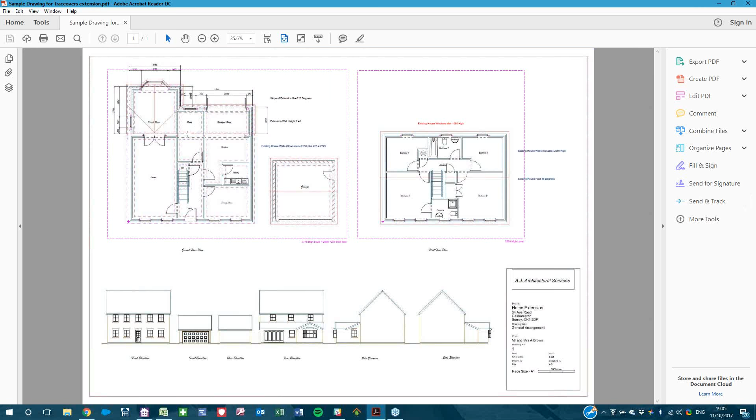Now on the PDF, that's it - let's grab the PDF and move it around. There we go, it's going to zoom in to this extension here. This is the extension we're actually building off the back of this property. Off the back of the extension, we've got a nice little L shape. We've got a lean-to roof, a couple of windows, a bifold door running off the back, and a bay window at the front, as well as the lean-to roof. We're also going to knock through or form some openings into this back wall that are then going to extend onto the back of that build.

Now, if I just zoom down a bit and then zoom in on the PDF, we can all see on the elevation side what the extension is going to look like off the back of the plan. So how do we get the PDF into PlansXpress?

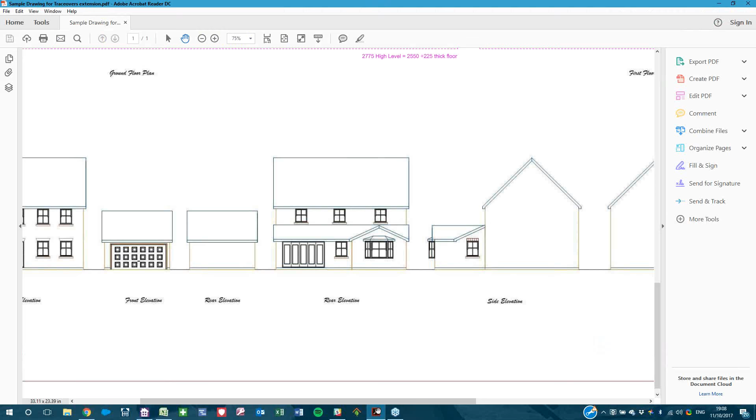So in order for me to get the PDF in here, I'm just going to go back to the PDF. I know it's an A1 1:50 drawing. We've got the drawing size, the page size, and the scale on there at 1:50.

Now, I've already got an A1 1:50 open anyway, but to demonstrate how you would open up a new drawing, you go to File, then New, and you'll see New from Template. When I open that, a dialog box pops up showing A1 1:50 for me to pick, so I'll just select that one.

And now we've got a second drawing on the page, which is A1 1:50. That's how easy it is to open up a new drawing. As I said, I've already got an A1 1:50 open.

Before I bring the drawing in, I just want to make sure my pen is right, because it's a drawing system with pens in different colors. You can set different colors, but we're actually going to be changing it to scan mode anyway.

What scan mode does is put a nice thick red line around the drawing you're tracing over, so you can see what you've copied or drawn out from the original plan. So I'm going to switch that on to scan mode.

Now to get the PDF in there, the PDF itself is called Sample Drawing for Traceovers. So what I'm going to do is go to my Drawing and Annotation tab, with all these little tabs running across the top, and click on the image file button to locate my image file.

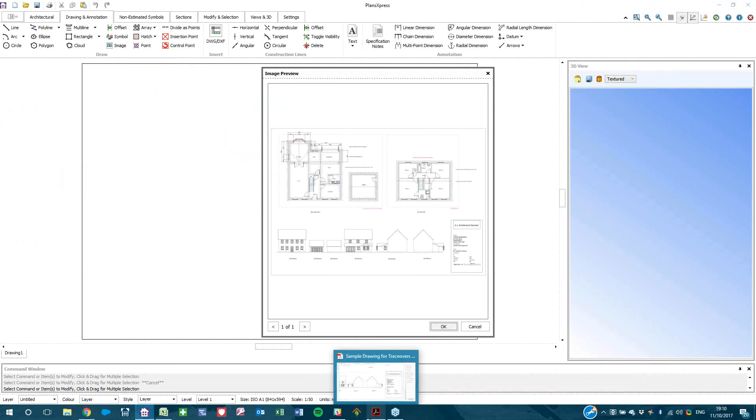I've got a folder called My Drawings, and my sample drawing for Traceover extension is located there. I'll click open, and we get a little image preview. Yeah, that's the right drawing, it looks like the PDF we had open, and then we click OK.

Now using the mouse, I'm just going to locate down to this bottom left hand corner. You'll see a little dialogue popping up saying Origin - that's the corner where I'm placing the PDF. With a left mouse click, stretching the mouse up to the top right hand side, that's our PDF in there.

So that PDF that existed as a PDF is now in my PlansXpress software. There's a couple of things I'm doing there - for those using Windows with a standard mouse, you've got a little scroll wheel. I'm rolling the scroll wheel so you can see me zooming in and out, and if I push it down, I get this little grab function.

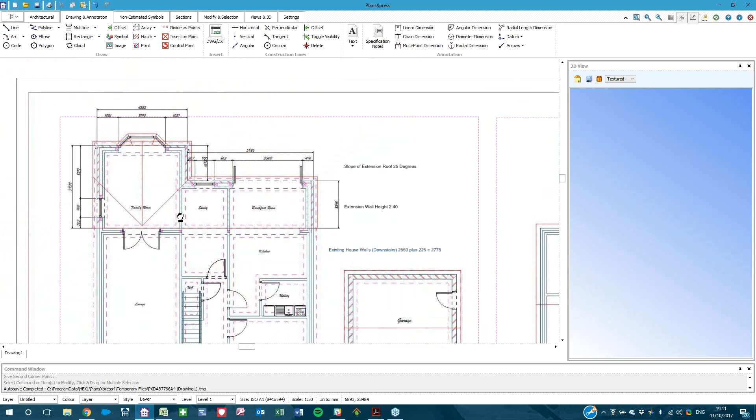It's quite similar to the grab function in a PDF, and I can move the drawing around wherever I want, so I can really stretch it out and get into the corners of the drawing that I want. Now Adrian Wild, the architect of the software, has always told me the best thing to do before drawing over anything is put down some construction lines.

Construction lines, imagine this in the real world, it's obviously a bit of string or rope that you're laying down, and it's kind of laying out the overall plan of the build. And it's the same in the software.

We've got these construction lines up here, horizontal ones and vertical ones. So I'm going to place a horizontal construction line. I'm going to line it up with this back wall where we're actually going to start the walls of the extension, and I'm also going to place one on top of that wall where the wall's running across the top. So what I'm doing is lining out where all the walls are - a wall there, a wall there, a wall line there, and a wall line there. Now I'm going to change it to a vertical construction line.

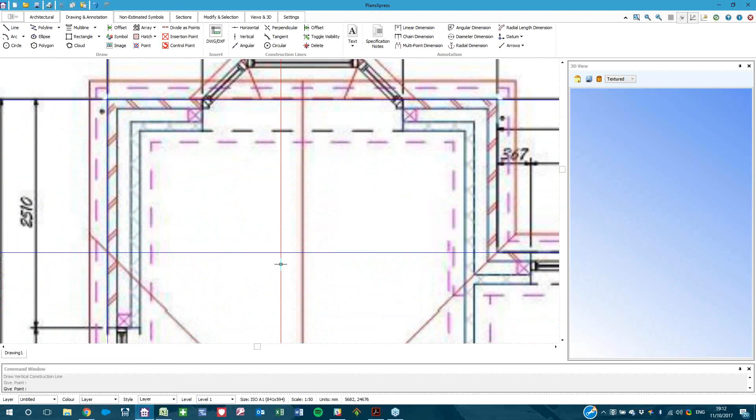I'm going to highlight the outside wall there, and I'm also going to highlight the outside wall line there. That will become obvious in just a second when we start tracing over these external walls, because the construction lines are going to act as a guide for me to trace around, so everything's going in a straight line.

So this wall is actually made up of a brick and block cavity wall. We know the wall height is 2.4 meters high, and we also know when we place the extension, the roof is a 25-degree pitch.

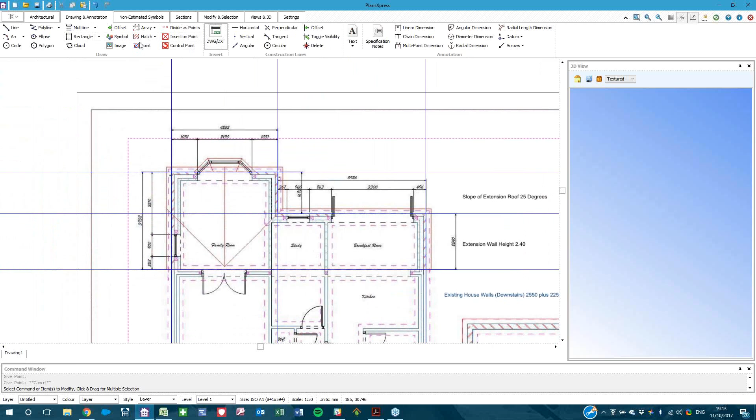So I'm going to pick the walls first. Now the walls can be found on the architectural toolbar at the top - I was in the drawing and annotation toolbar, the one to the left is the architectural toolbar. This will contain all the elements that you can use to actually build in PlansXpress.

Now I'm going to be drawing the external walls. If I drop that down, you can see I've got a few options here. I can pick a brick and block cavity wall, an external block cavity wall if we're doing a render finish rather than brick, or a stone cavity wall. We've also got some other walls like ICF walls and SIP walls if you're using that particular building method. If you happen to do some cladding, you can apply cladding to the walls you're building.

If you need to convert any of the internal leaves to a timber frame panel, you can do that as well. Or if you're doing garages and just using solid leaf brick walls or solid double leaf brick walls, you can choose those too. But I'm just interested in doing a brick and block cavity wall.

Now, as I said, the wall height is 2.4 meters. You'll see here I've got two options around 2.4 - I've got a multi-story wall or a single story wall. If I pick the multi-story wall, what that would do in the dialog box is give the height of the wall an additional

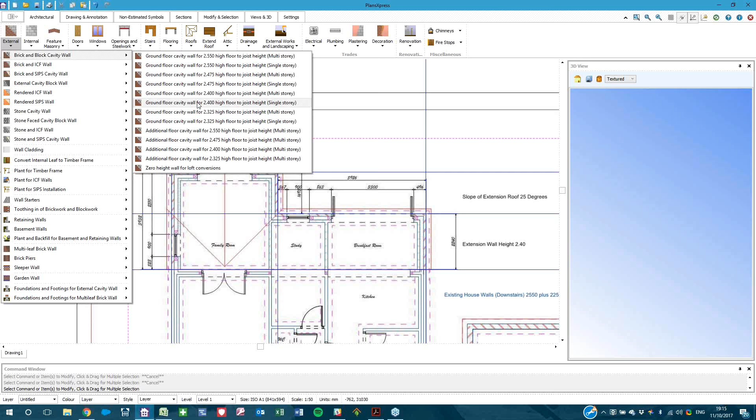225 mil for the additional floor that's going to sit on top of the bottom floor, giving me my floor space on top. But if I actually pick the brick and block cavity wall just on a single story, 2.4, then all it does is give me 2.4, because it doesn't assume we're doing any other floors on top of this one.

Now you'll notice this dialog box does open - these dialog boxes are exactly the same ones you'll find in EstimatorXpress. So if I was estimating without PlansXpress, this is how we would actually estimate in EstimatorXpress. So what we're effectively doing is estimating the plan, and when it gets fed into EstimatorXpress it just reads all the dimension sizes and estimates based on what you've told it. You'll see here it's the overall wall dimensions, we've got 2.4 for the height.

We can also switch on these two little buttons and they give you a bit of help. So if I switch on my tech tip, if I'm in that section asking me for the height, you'll see a little description in the top right hand corner of what it's asking for - it's asking for the height of the wall, the overall external brickwork measurement, measured from above the DPC there.

For simplicity, differences between the height of the inner block work leaf and the outer brick leaf are actually ignored, so there's a little guide there to tell you what it's actually doing. Same if I go into this, you've already got an external leaf thickness in there, so it's making some assumptions about the makeup of this wall.

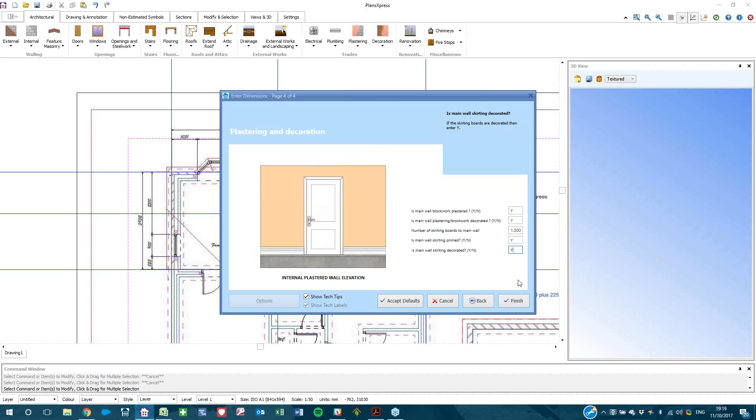We've got a yes in there. Are you going to be putting a skirting board in? Yes, we are - we're going to put a skirting board around the internal leaf of the walls. Are you also going to prime and decorate the skirting boards as well? Yes, we are.

So when we press finish, what I'm now going to do is actually place that wall in that corner. Now you can see you've got a little bit of dialogue - hopefully you can all see it, it's quite small. It says the intersection - that's basically the intersection of the construction lines that I laid down, which help as a guide.

So if I left mouse click on there, you can see that little red line - that's the wall I'm about to place. And I also just need to flip the walls to the left-hand side. That little arrow is telling me that's pointing to the outer leaf.

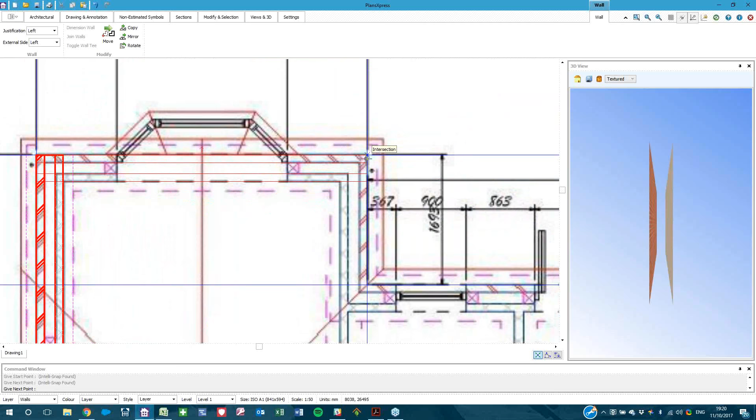Now if I go up to that construction line, it's actually finding the intersection. I'm clicking on there. You'll also see on the right-hand side where the 3D is, you can actually see this getting built up in a 3D environment, so you can see our bricks and the shape of the extension already kicking off.

What I'm also going to be doing is placing a wall from that corner to that corner, because when we're building off the property, we're obviously going to be building off an existing wall that's already standing. Now, obviously, you don't want to be estimating that wall because it's already there. So what we can do, we've got a little feature built into the software.

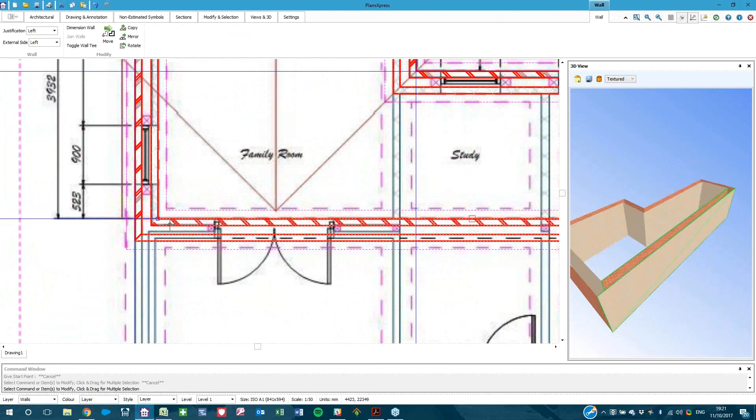If I select that wall, you'll see it selected - on the 3D it gets a green line, so that tells me it's actually selected. And you can see there it changes, not shape, but certainly a different kind of view. It's all a bit broken. So that means you've actually selected that wall.

Now what I can do, the middle scroll wheel button has an extra function. If I press it down, it gives me these other options. Now what I can do is actually set that item as non-estimated. It's asking me again to double check, are you sure you want to do that? Yes, I do. So that wall now isn't going to be estimated when we put it into EstimatorXpress, because as I said, it already exists.

But what it's going to be used for is when we actually form the opening there, and also there - you'll probably be putting a door on this bit to get into the extension. So we're actually going to be using that wall to form these areas, but we're not going to estimate it.

The next thing I'm going to be doing is placing a slab into that space there. You see here at the moment there's not a slab in there. So I can go to the flooring section. We've got some different options to choose from - suspended floors, cassettes, slabs, raft and toe, beam and block if you're doing a beam and block floor. We've also got some tiling and commercial carpeting, and just standard screeding as well.

So what I'm going to be doing is placing a slab. I'm going to pick the slab, pick the extension slab, and then it gives me an option - is it reinforced, is it unreinforced? I'm going to pick the reinforced slab.

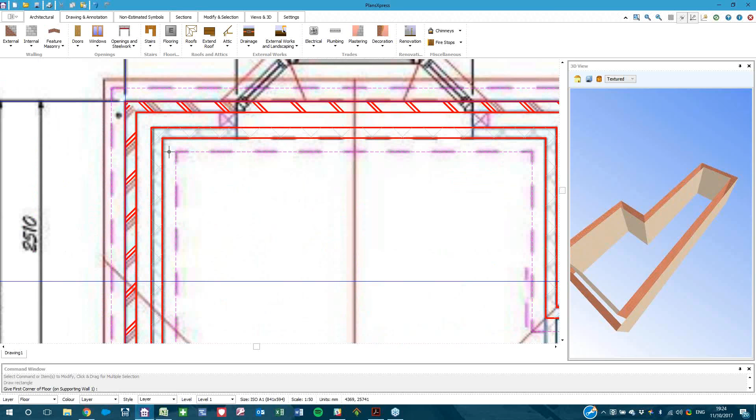So to place a slab, I'm going to go to that corner, click to that corner, and then pull the slab down to that corner. I'm not going to put any perimeter insulation, but I can do - I would just go around the corners and put the perimeter insulation. That's only half a slab though. If I want to place the rest of it, if I right click, it remembers my last command.

So there's little shortcuts we've actually built into the software. I'll accept defaults there. I'm going to put the other slab from there to there, and then go up to that corner to meet the other slab. And then you can see there, we've now got the slab into the extension as well, giving me that area of slab on the extension.

So what I'm going to do now, I'm actually going to put in some internal block walls. We've got two block walls here. Using the internal block walls, I could put some internal cavity block walls if I wanted to, but I am just going to do the standard block walls. But you do have options in here for stud walls, metal stud partitions, and also options of SIPs and ICF and stuff as well.

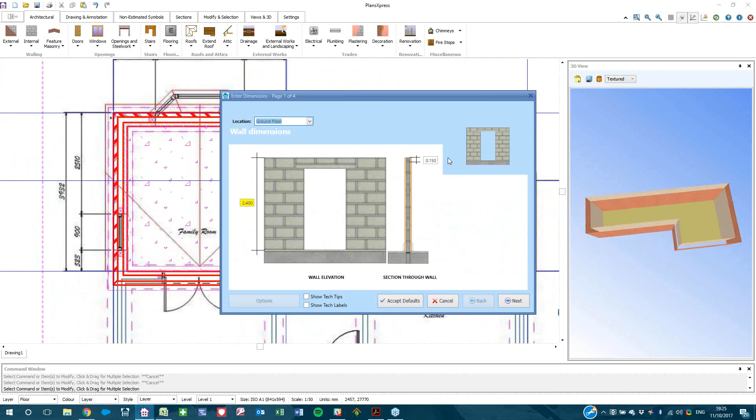Again, 2.4, so the same as we pretty much did with the external walls. I'm going to pick 2.4. Very, very similar. Obviously we've got, you might have a door in there, but we are actually going to do foundations and footings on that as well, and then press finish.

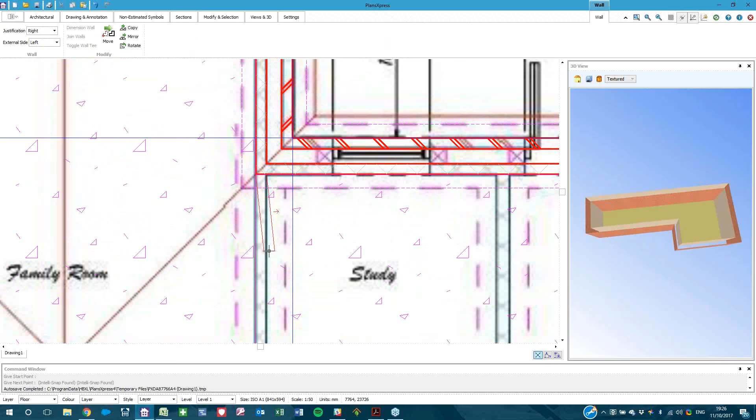And then what I'm going to do, that's going to be my first wall. Now you'll see there it's just hanging over the edge, because if I was doing the wall that way it would be flush to the edge. Now there's a real nifty way to change that. You'll see these little options here, top left-hand side. If I just change the justification to the right-hand side, you'll see now it's actually flush. And once we get down to that point, it will then drop, I'm just going to zoom in, you can then see that block wall on the 3D.

If I right click again, it will remember my last command. This time I'm actually just going to do a wall freehand, and then we can just drag it down, find the perpendicular point to the other wall, and again you can see on there we've now got our two block walls.

So what I'm now going to do is show you guys just how we form an opening. Now the best way to do this is using your construction lines, because what I'm going to do is drop a vertical construction line just on the edge of where that opening's being formed. Then I'm going to use the linear dimension tool. So what I want to do is measure from that construction line to that wall, and that's giving me a gap there of 3.3 meters.

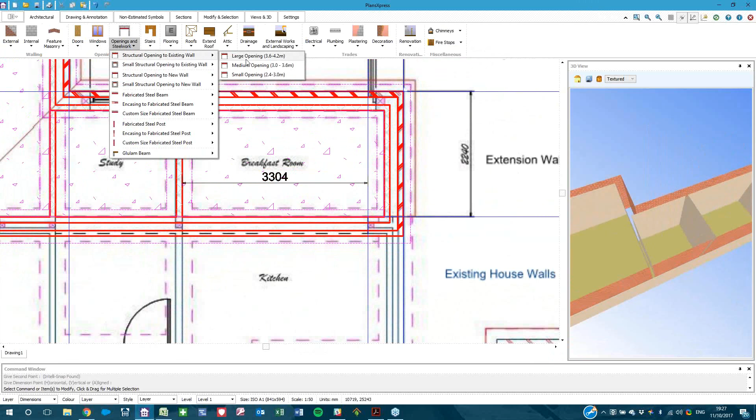So what I'm now going to do is go to my openings and steelwork. This is where your structural openings are found. We've got a structural opening to an existing wall, structural opening to a new wall. So I'm going to do it to the existing wall. I'm going to pick the medium opening, but I'm actually going to make that adjustment 3304... I can put the 04 in there if I want, or just use 3.3 meters. This will also give me an estimate once it goes into EstimatorXpress.

You can see there we've got our steel going across there. We've got the height of the opening. We've got our pad stones. We've got a number of bricks at each end. And we've also got a number of slates required for packing. And then we've also got our plastering around the opening as well. And then all we do, that's the opening there, all we do is then line it up, and then just left mouse click, and you can see on there we've now formed an opening on our 3D.

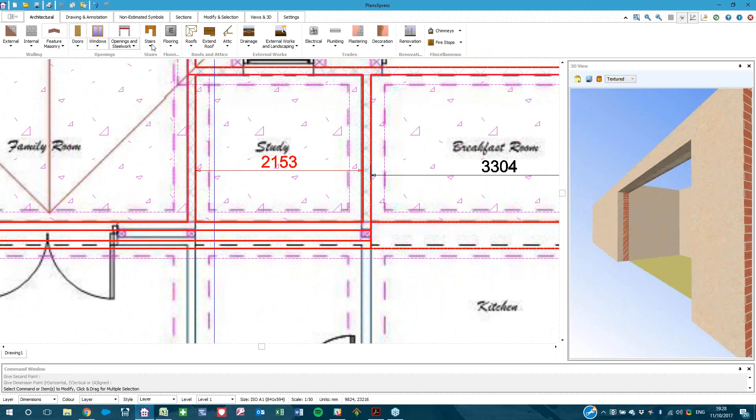We've also got another opening here, but I don't have to draw a construction line this time. I can just measure off the gap between these two walls. It's 2153. So again, all I do is structural opening, we'll use a small one this time, and then we'll just change that one to 2153. I can put the 53 in there as well if I want to, accept defaults, and then we've got another opening there that we've just formed into that wall.

What I can then do is highlight that dimension and then just press delete, and it just disappears. I can highlight that construction line and just make it disappear as well. A couple of details I'm going to put on here as well. According to the elevation, we've got a bay window, we've got some bifolds, and we've got a couple of windows as well.

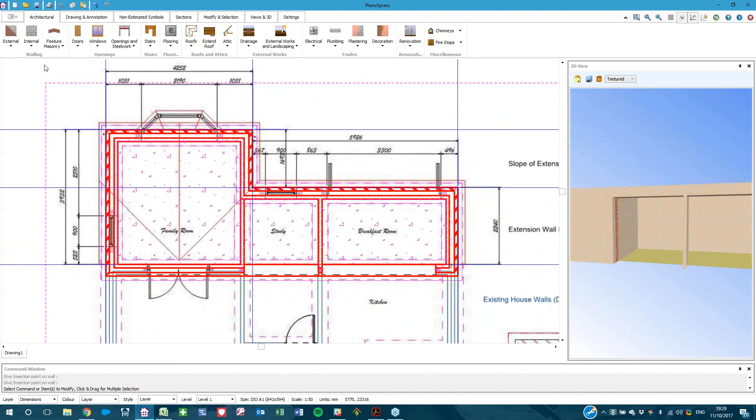So what I'm going to do, the actual window sizes are 900 across. So within the window section of PlansXpress, we've got all these lovely windows that we could choose from. So I could choose the softwood bar dummy sashes, and I can choose the 9x9. And again, the thing is with the software, once you start getting used to the dimension sizes, it's actually giving you on doors and windows and things that are pretty much standard sizes. All you've got to do is accept defaults, because you know what it's estimating for. We can press defaults, and then we can just line up that window there, and line up that window there.

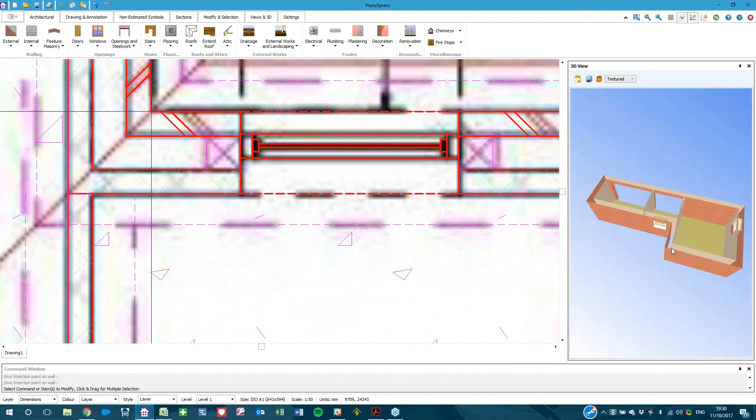I'll just reset the view, and then we've got our window at the sides and window at the front. So you can see our 3D extensions really taking shape.

We've also got a bay window at the front here. So within the window section, we've got the bay windows at the bottom, again softwood dummy sash, or bar dummy sash, sorry.

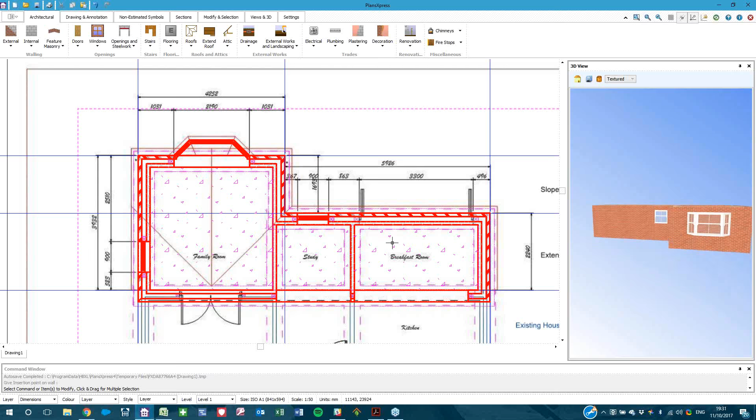I do know the window size is 12x12, so I'm going to cheat here because I've done this quite often. But it shows you, once you get used to the software, it's really just a case of dragging and dropping items from the library straight onto the PDF plan. So if you've sat with a PDF plan on your desktop using a ruler to scale and calculate it, this software does it all for you with the right window sizes, door sizes, and walls, and we'll stick a roof on in a sec.

We've also got a bifold door going across there. We actually know the size of the bifold door is 3.3 meters, so I'm going to go to the door section.

I just want to show you guys as well, we do actually link our software to a supplier of UPVC, also aluminium - they do, and I believe they do wood types as well. It's called Crystal Direct. I don't know if anybody's come across them - if you've been in TradePoint and bought your windows and doors, they actually supply the likes of TradePoint. Now what they're doing is giving you access to their manufactured windows and doors, so you're going straight to the supplier.

And they will deliver direct, and they'll also do an installation if you want, or they'll leave you to install it yourself.

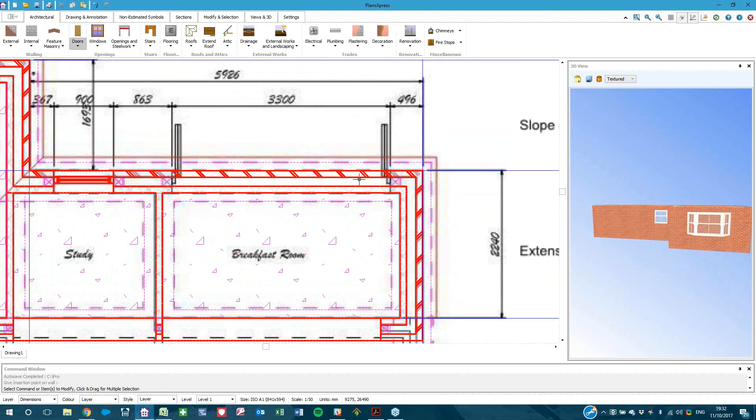So if I choose the Crystal Direct bifold door, it gives you access to their library of what they offer - you'll see this box popping up. You tell the software the width of the bifold is 3.3 meters. It will also give you a choice of colours - maybe the customer is asking for a red bifold door for some reason - and you've got the one to choose from there. It will also supply you the steel timber frame lintel, and the cavity closer system that they supply.

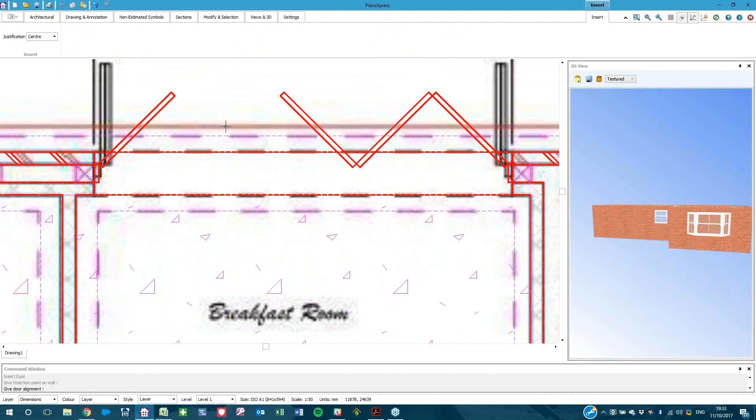It'll also give you the price in there as well. Accept defaults, and then we'll line that one up - it doesn't have to be particularly perfect. They've got a slightly different view on their bifold doors, and then you'll see there you've got a red bifold door supplied from Crystal Direct. Once you produce the estimate, that will then ping off, with your permission, the material to go to them, and then they'll be in touch to say when you need it. And yeah, you should have a cost because it would be a live cost in the software.

So you can see it kind of taking shape, our 3D image. You can spin it around if we want to.

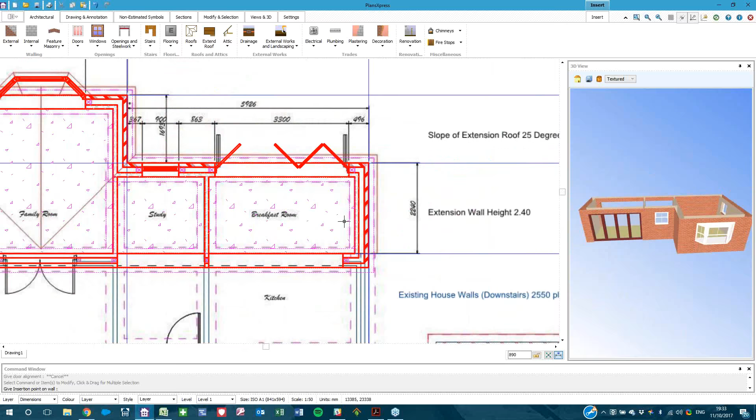Just the last thing to finish off on here is going to be the roof. So obviously we don't have a roof at the moment. To pop the roof on, as I said, we do know the roof itself is a 25-degree pitch, so it's quite shallow. If I go to the roof section, we've got different roofs we can select from - we've got cut roofs, we've got truss roofs. If you're doing attics, you also have your dormers, and you can put a roof on the bay window as well, which I might do just before we finish off. If you're doing a flat roof, we've got our flat roof stuff in there as well.

So I'm just going to do a cut roof. I'm going to choose the 30-degree pitch because that's the option I've got, but I am going to change this - so I'm going to press the tab button, and then I'll change that to 25 degrees as well. That's giving you the overall roof pitch valleys.

It'll also give you where the purlins, binders, soffits, and wall plate are going to be going. Timber details, so I'll have all the timber sizes, and you can switch on this - spacing your joist noggins, width of your rafters, length of your gable noggins, gable straps at verge level centers, and also your spacing of gable noggins as well as your wall plate strap fixing centers. So everything's kind of in here for you.

Height of your barge boards, joist centers, height of your fascia boards, your tiling details as well, and that'll be your overall roof tiling estimate for all the tiles you're going to use, and whether or not you want to prime and decorate your barge boards. Now we've got a plastic one, so we're not going to be doing that, that's why it's defaulted to no.

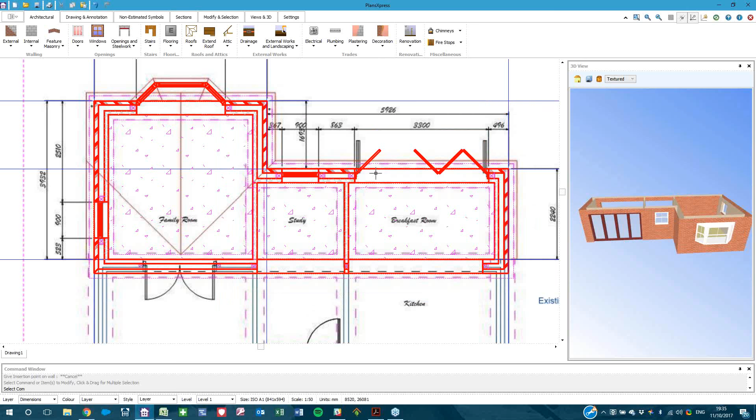So to drop the roof on, we pick the lean-to roof, click OK. In order to pop the roof on, I just got to select a wall that's going to support it, so it's going to be that front wall. Then what we do is we give the width of the roof, and then give a length, and it's going to fit to there. You'll see on the 3D, we've got our roof dropped on, and it'll also fill in the gable and stuff, so it'll give you the extra brickwork you're going to require.

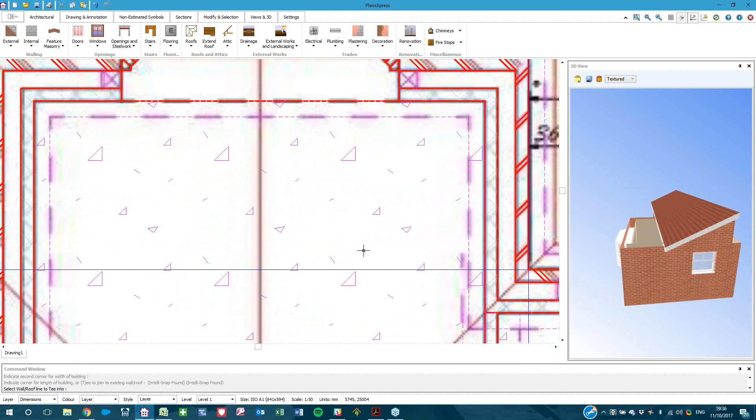We've also got a roof that's going to be sitting on the front here. So again, if I right click, it will pick the same roof that we've just done, as in the pitch and all the estimated quantities, but this time we're actually picking an apex roof rather than a lean-to. Same process: we pick the wall that's going to support it, and then we pick the width. But this time we're not giving the length, we're actually going to tee it into the lean-to. We do that by pressing the T button to tee it in, and then we select the roof line to tee it into. And then hey presto - just to sort out the 3D, press refresh, and all the gable and everything else, the brick gables, is in there as well.

So as you can see, this is the extension that we want to estimate. I'll also do this little small one on there, just to put on top. I'll just leave it - no, I'll change that to 25.

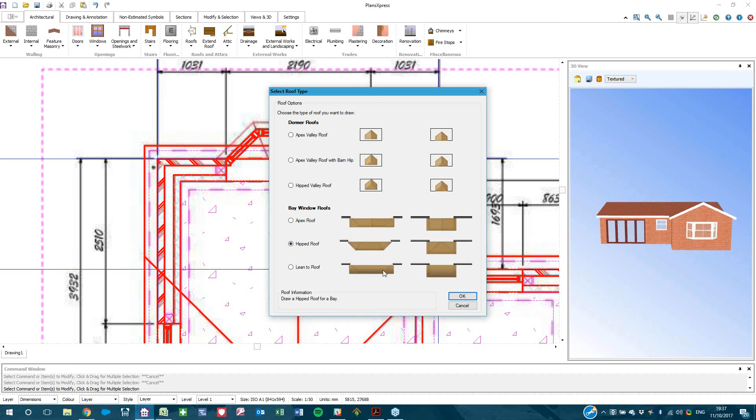Accept defaults, but this time we're actually going to do a little hipped roof, and then we just touch the bay window, and you'll see there if I just zoom in, so it's even put the little roof onto the bay window for me. So I can now see that.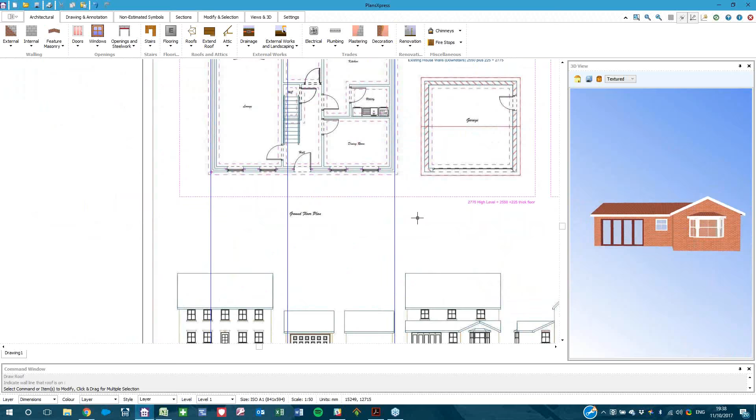That, although not probably perfect, kind of looks like our elevation in 3D.

So now that I've actually done the trace over, and I've put all the walls and the doors and the windows and the slab and everything else, what I'm now going to do is actually save it.

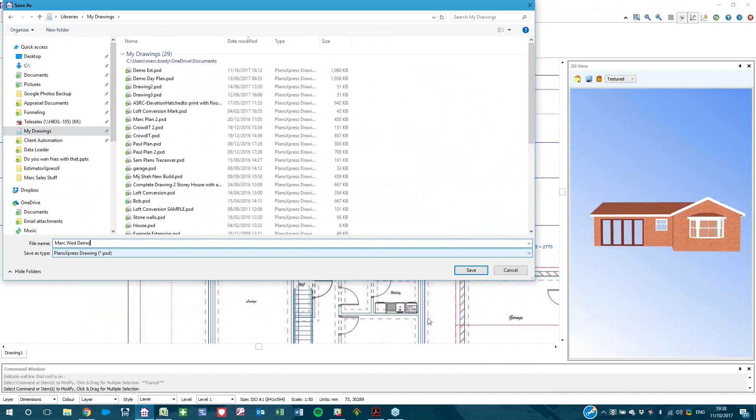So I'm going to save as, and drop it in my folder called My Drawings. I'm going to call this Marc Wednesday - oh, I've got capitals on there - Marc Wed Demo.

Save as a PlansXpress file, and then I'm going to minimize that. Now I'm actually ready to pull it into EstimatorXpress, and then it's going to quantify everything for me.

So this is EstimatorXpress, already opened in the background - slightly different system than PlansXpress. PlansXpress being CAD, this is more for pricing everything up.

So what we would actually do is we'd go into My Estimates.

Being in My Estimates, this would be where all the jobs that I've estimated over time are kept. There's not very many in there - I tend to use this as a demo license, so I do tend to clean it up now and again.

But in order for me to then do a new estimate, you can see on the top toolbar you've got a new estimate button. It's quite straightforward, so you click on the new estimate button.

Now I've got these options here. I'll come back to quick quote hopefully towards the end, just to show you guys how that quickly works. But what we're going to be doing, we're actually going to be doing a plans import for rapid takeoff, so I'm going to click that button there.

It's asking me where's your drawing, so it's actually in that little folder there - Marc Wed Demo. Click open.

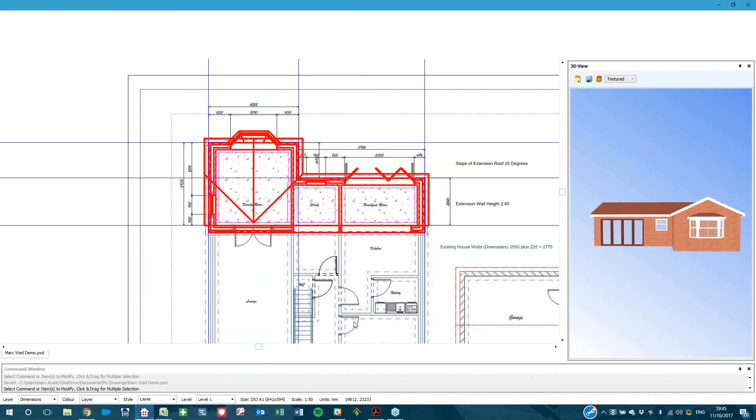It seemed to fill in. Yeah, I think that was because my roof, I probably extended too far back. I think you're on about that there on the brickwork - that's because my roof, when it came back, again, that's probably quite an easy thing to fix. It's probably just looking at the height of that. It might just be in the 3D model, but obviously that wall there isn't going to be used to actually build anything - that's just a wall that's already kind of standing anyway. So that might just be an anomaly with the 3D, or I haven't taken the roof back far enough. That could just be me clicking a little bit too soon.

Yeah, once it's in elevation, you can add stone sills on the elevation side of it. That's quite easy to do. You've actually got feature masonry, so once it's up in elevation, you can put stone sills on there, quoins as well as a soldier course and dentil course and brick quoins going up the side and brick arches - that's all kind of stuff. You've got your stone heads and stuff in there as well. So once it's in the elevation, you can then add them to that. That's easy enough to add.

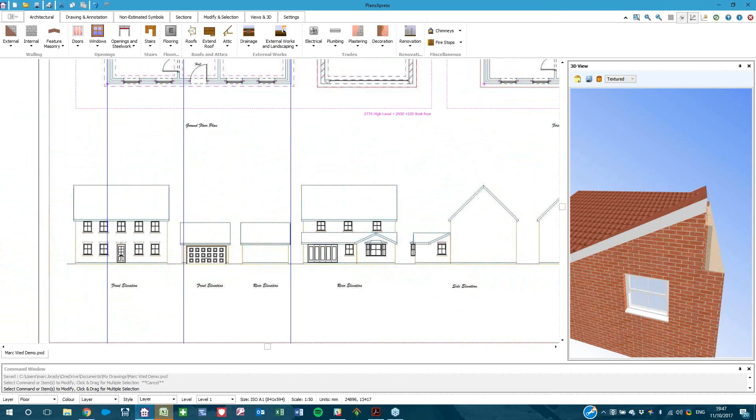No, it's not just about the overall - there are certainly other elements you can place on the plan. There are also electrical elements you can place on there, where your light switches are going to go, strip lights, wall lights, where your doorbell is going to go, and that will kind of estimate them up as well in EstimatorXpress, as well as plumbing. You can designate which windows are going to have radiators underneath, towel rail you can pop in there as well as where the boiler is going to go, gas pipes, water pipes, even where your bath is.

What I'll do before we finish, I'm going to show you a complete house build that's been done with all the trimmings, and hopefully that might show you.

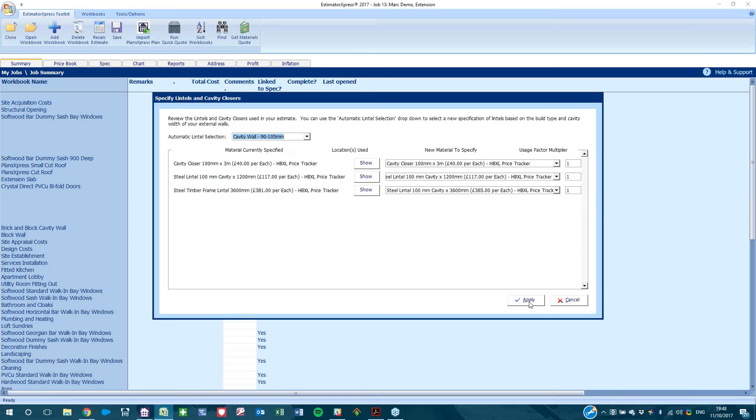So when we go back to EstimatorXpress, hey presto, it's all being imported. It's just asking - I've got a couple of items to consider, just the lintels, as you can see there. It's telling you what lintels and stuff you're going to be using. You could then give the cavity wall its automatic lintel, and they'll drop the lintels directly into the estimate. So that price should slightly change.

Once it finishes, let's take those bits of dialogue out. So that job has actually been estimated at 30,483 and 51 pence, and that's excluding any VAT, and it's also excluding any profit at this stage. So that's materials, labour, plant, subcontract, and also sundry resources - that's kind of item costs. It's actually estimating there at 30k.

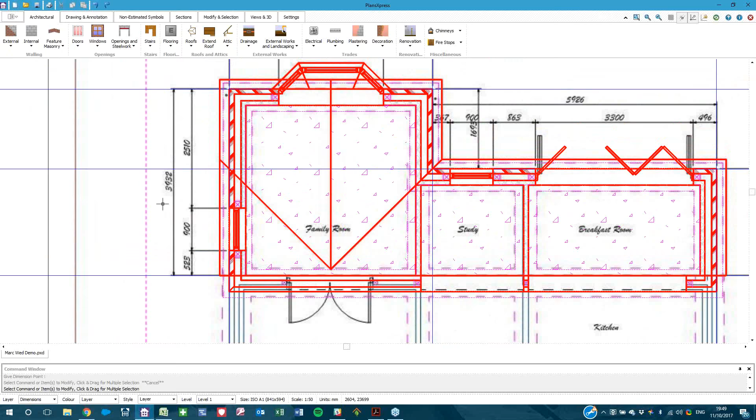I believe the size of the actual plan - if I click on there, you can pull the dimensions out. Oh, I don't want to do it from there. Let me just close that 3D, just take that back out. It's actually measuring it from that wall, not that wall. So it's about a 4 by 6, 7, 8, 9, 10 - yeah, it's about a 4 by 10.

So we're actually getting a price there of just over 30k on the item costs. Structural opening 1820. Bar dummy sash windows 2397. The 900mm 1700 for our smaller section of the roof - actually, that's for the one sitting on top of the bay window - 841. And the main cut roof 8146. The slab just under £3,000. A bifold door that's been priced up at just over 3,000. The total walls we've estimated 8253, and also the internal block walls in there as well at 1325.

So you can obviously see, with me babbling on chatting away, we started this just after 7 o'clock, so within about 50 minutes I've got a pretty good idea of the initial cost of the build. Now there's obviously going to be lots of other items that you need to think about estimating for, and this is where EstimatorXpress comes into it.

It could be site appraisal costs you need to factor in, site establishment, maybe the customers turned around and said they would like a fitted kitchen in their extension. We might be having to do some fitting out of rooms, bathroom and cloaks, plumbing and heating if you want to add it. Now obviously, because we've dragged it in from PlansXpress, it doesn't mean you have to go back into PlansXpress to do any more estimating - we're in EstimatorXpress, we can add any other element to the job. So if you want to add a couple of radiators even at this stage, let's say we're doing a K2 double panel radiator, 400 deep, so we can pick that one.

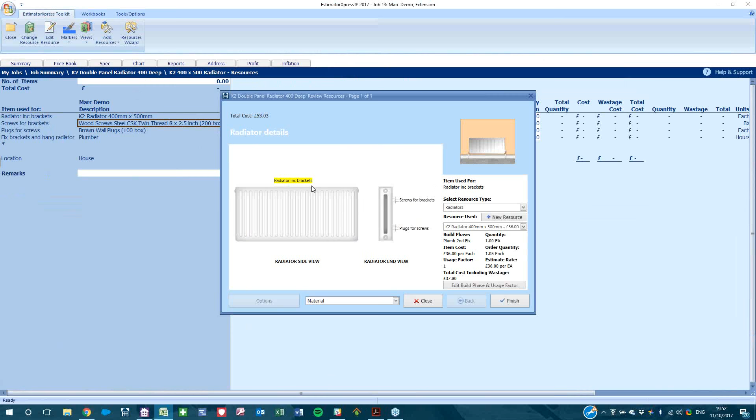So that's the radiator there, including the brackets, screws, and plugs - they're all in there. Let's say maybe you've got 4, so that's going to estimate the 4 at £212 for the 4 radiators. Then we can close that one down, and that will be added to our estimate. It just drops into the bottom there.

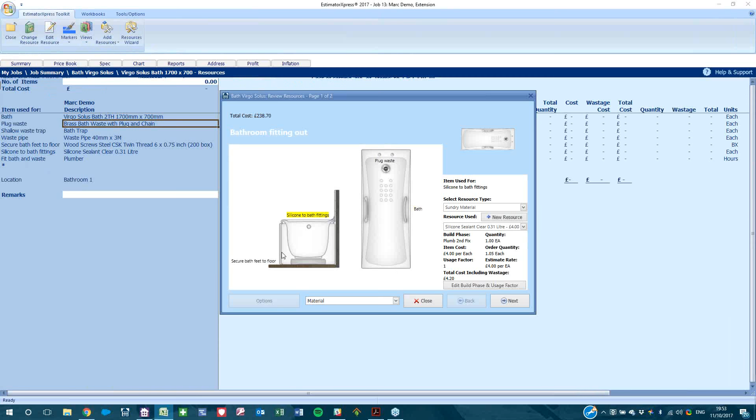Then what we can do is go back to the workbooks and say we're putting a bath in there - so we've got a Virgo bath. So you've got your bath, silicone to the bath fitting, securing the bath feet to the floor, and your waste pipe, and we've got one of those.

So whatever you think you need to estimate once it's come in from PlansXpress. I mean, I could be doing any of this stuff in PlansXpress anyway - it depends on how much detail you want to put in on the trace over.

Again, going back to the workbooks, we could be doing some drainage - so we've got some drain runs. Now again, these are items we could be doing in PlansXpress, hopefully saving us a little bit of time. You can do your drain runs, soakaways. What I'll do is just give you a bit of a flavour of what it can estimate, what you can actually do yourself.

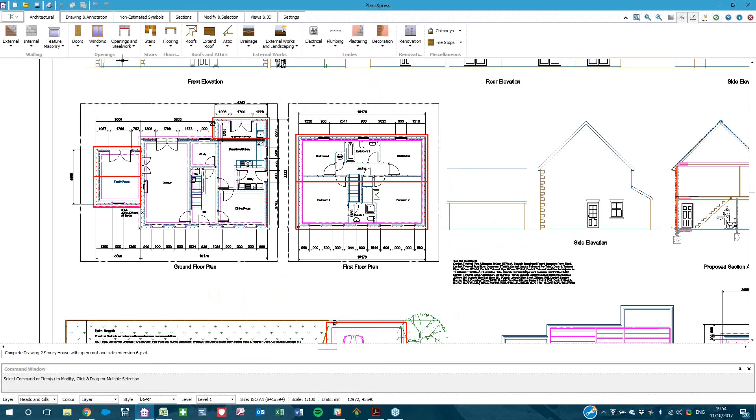This is a complete house drawing. I'll let you see this before we do a little bit of the EstimatorXpress. So what we've actually got here - I'm going to zoom out. It's quite a big drawing, but you can actually do that. This isn't tracing over, by the way - this is just drawing in PlansXpress, and again this would all be estimated at the click of a button. So I'm just going to zoom in.

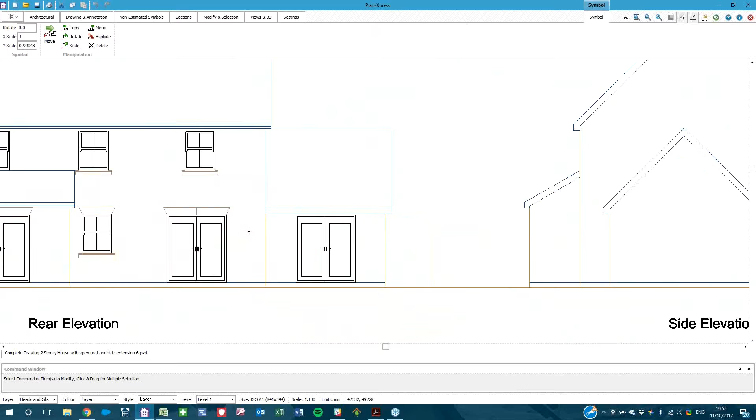Just going to zoom on that elevation there, so you can see where you've got your sills and stuff, and your kind of quoins on the side of the build. That's the side elevation, that's the rear elevation, and again the side elevation there with a kind of garage on the side. We've also got our sections as well.

That's our first floor plan, so you can see where the hot water cylinder's going to go. You can see where the baths and toilets and everything else are going to go, where the landing is, where the stairs are going up, little cupboards and stuff as well. Got a little ensuite just coming off both bedrooms.

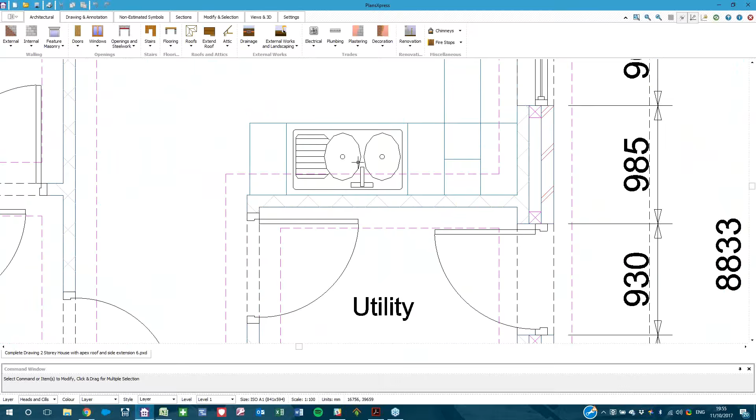And this is the downstairs - you've got your family room on the left, got your RSJ to the engineer's design, breakfast kitchen so you've got your basin and stuff in there, utility room, again got a little WC just underneath the stairs, got a little tiny study room there, and you've got all your dimension sizes.

And this is the external side of it, so again this is demonstrating where your drain runs, your soakaway and everything else are going to go. You've even got a patio you can do, so you can actually do external works as well as landscaping. So it's not just the trace over element, just being able to do something really quickly - that's only part of it.

The other part is - I don't know if anybody's got those kind of aspirations - one of the things we talk about in the demo days is if you want to sit down with a customer, especially with really simple drawings like extensions or attics, even just a small bungalow, you can do that in the customer's presence to give them a footprint of what it's going to look like. You can demonstrate to the customer this is an idea of how it's going to look, where your doors and windows are, the overall feel of the build with the elevations - you can really give them a quick idea, and then get that estimated.

We'll go away, we'll price it up for you, and then we'll come back with a nice breakdown with JPEGs and 3D views, and you can really sell the service, as you can see there.

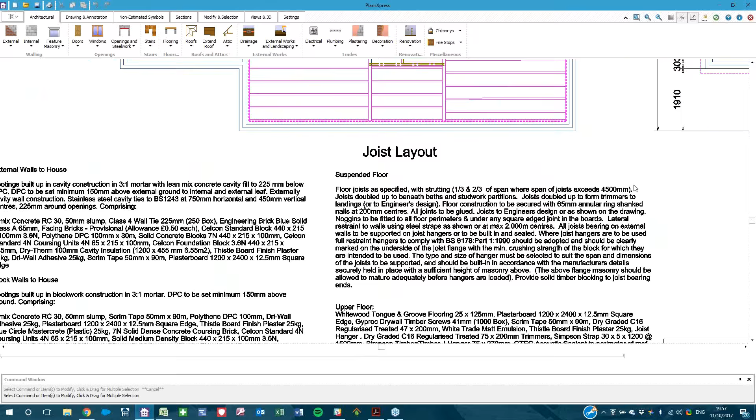And then it's using these kind of plans, and the actual estimated content comes across, and you can place it into PlansXpress by exporting the drawing, the estimated notes, and the building regs stuff directly back into PlansXpress. So that's certainly one element of the job.

So going back to EstimatorXpress, whatever you need to estimate - preliminaries, travel costs, design costs, service charges, putting up scaffolding, fitting a kitchen, fire stops, any subcontract work you're being charged for, chimneys, flue systems - renovation work. The software will cover hacking plaster from walls, repointing brickwork, underpinning, chasing walls if needed, openings into existing floors, roof renovations, how much tile reuse you're going to be using.

Stripping out - there's actually going to be a lot of updates with regards to the renovation workbooks. We're working on revising a lot of the content in there, because it does tend to change quite quickly, so there'll be lots of updates over the next 6 months.

If you're just doing some decorating work, it will fit that. If you're just doing plastering work, it will fit that. Any kind of external works, concrete, tarmac and drive, panel fencing, as well as drainage, sewage, as well as loft conversions. If you're converting upstairs into a cut roof attic, interior conversions are in there as well as your roofs, etc.

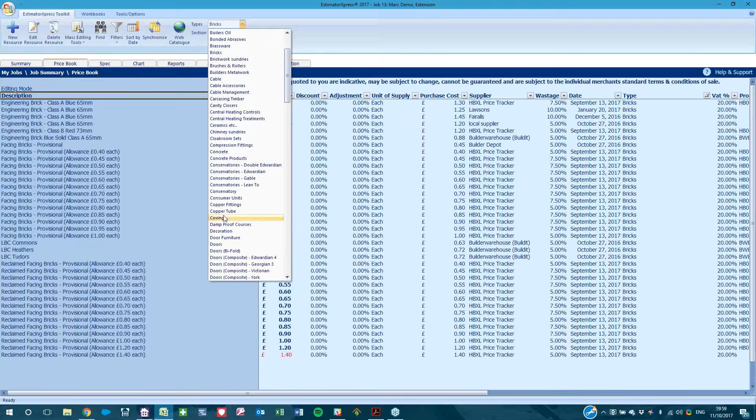This is the material price book. We are in the materials here. On the left hand side, this is a list of all the materials that are in here. You can filter them off if you just want to look at your blocks, your bricks, your concrete - even down to your coving is in there as well. Conservatories are in there too.

Where it gets its prices from - anybody who's spoken to us may have had a look at our details online. You'll know that the software links into another couple of merchants, Jewson's being one of them, Travis Perkins, TradePoint, Keyline, as well as Crystal Direct. Now it links into those merchants - we can set up, you give us your account number, we then link the software to your account details.

That means that the prices get drawn into the software. They'll come in with your discounts in the discount column, as well as your suppliers, and they'll all be listed in here with your wastage costs, etc.

You can actually add your own materials to the software. You can click on New Resource, and that gives you a copy of the one you've just clicked on, and then you can change these elements - change the suppliers, delivery times, wastage allowances, VAT.

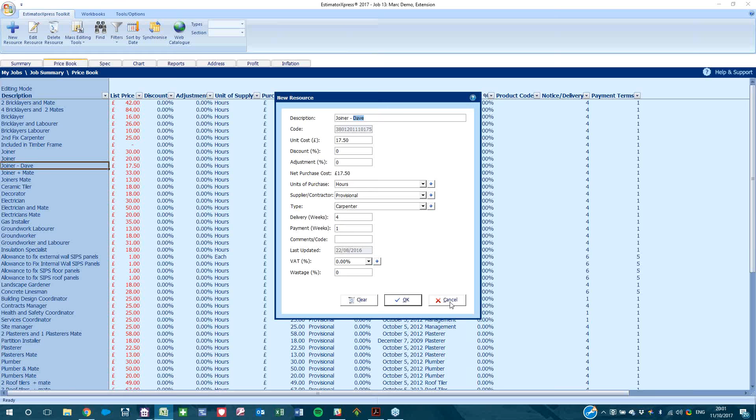As well as the materials, you've also got the labour elements. The software comes out of the box with these labour gangs, tradesmen - 2 brickies and a mate, 4 and 2 gangs, individual tradesmen, joiners. If you want, you can add your own resources and put your joiners in by name, especially if you're getting joiners charging at a different rate, so you know who you're actually using. You've even got a health and safety coordinator or a contracts manager, a plumber working for you, specialist fitter - they're all in here at an hourly rate, so that's like £84 an hour.

You've also got your plant as well, so you can list all your plant requirements in here: skip ramps, cherry pickers, block cutters, plate compactors - they're all in here, sledgehammer.

You've got all the items you would actually need, as well as all your subcontract prices and stuff in here. So it's a whole library that we maintain. With the HBXL Price Tracker prices, we update it, but you also have a centralized library which you can control depending on whether prices are going up or coming down, or you link it to the merchants we suggested earlier.

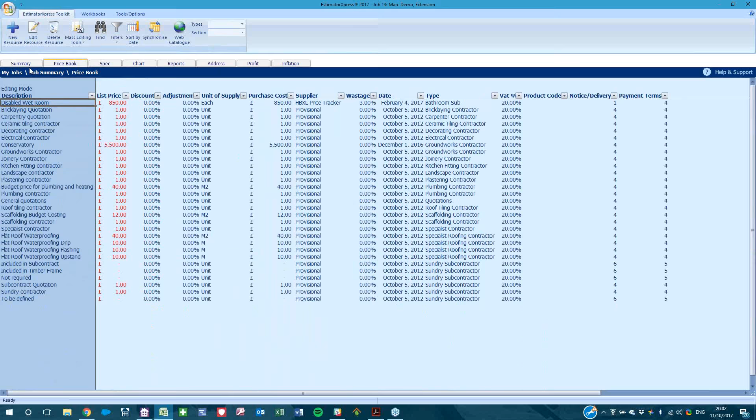Going back to the overall summary of the job, I want to bring your attention to the brick and block cavity wall workbook. I'm going to open this up and show you the walls individually that we estimated from the set of plans. These are the 5 walls in the plan. There's obviously a 6th wall not in here, the supporting wall we said we weren't going to estimate, so these are the other 5 walls for part of this L-shaped extension.

This is pulling in all the dimensions that PlansXpress gives, that we drew or traced over on PlansXpress - all the elements of what we told it that we wanted to estimate.

If I go into View Resources Output, this gives me a breakdown of all the items it's going to use to actually build this wall, or build these 5 walls. I'm going to switch on this highlighter to bring it to your attention. So we've got our structural concrete, and I'm also going to look at quantities, which tells us how much of that material we're actually going to be using on these walls. If it's zeroed out, we haven't estimated for it because we didn't tell the software we wanted that.

Your trench blocks, the block work to the inner leaf below the DPC, we're using a solid dense concrete block. You've got your facing bricks in there as well, but this is the one I wanted to show you - the bricks above the DPC less any opening.

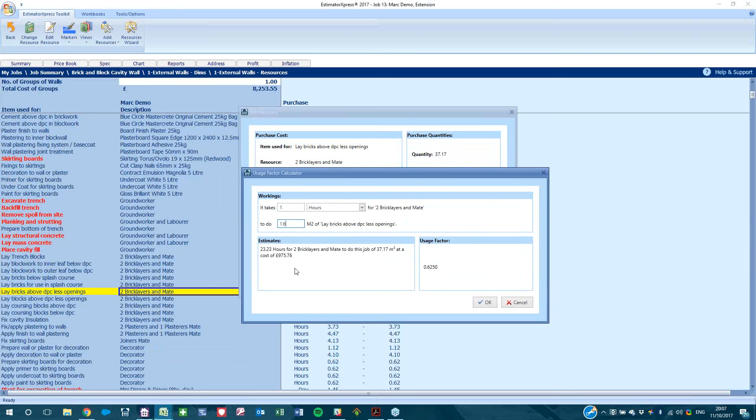Now if we had a labour gang that was either slower, taking an hour to do 1.1 square metres, or faster doing 1.9, you can see the actual rate itself just changes. If that's going to take them 37 hours to do 37 square metres, it's going to cost you £1,561. But if they're doing about 2 square metres, we're reducing the time - it's set at about 1.6, which is an average rate for laying that amount of bricks. So you've got the ability to change that rate according to the type of gangs and tradesmen, based on how fast they're actually working, and tweak the software accordingly.

But it does give you quite a good estimated rate at £26 per square metre. It also covers all the other elements—brick ties, how many you're going to use, insulation block, cavity insulation, building sand, skirting board. We've got 20 metres of skirting board, and even a third of a box of nails used to fix the skirtings. Obviously you're not buying a box of nails on every job, but you're using a third of that box and will have to replace it at some stage. Then you've got your decorating finishes, and it gets into the labour elements, like the ground worker excavating the trench. So all these elements are already built into the software if you're building a wall.

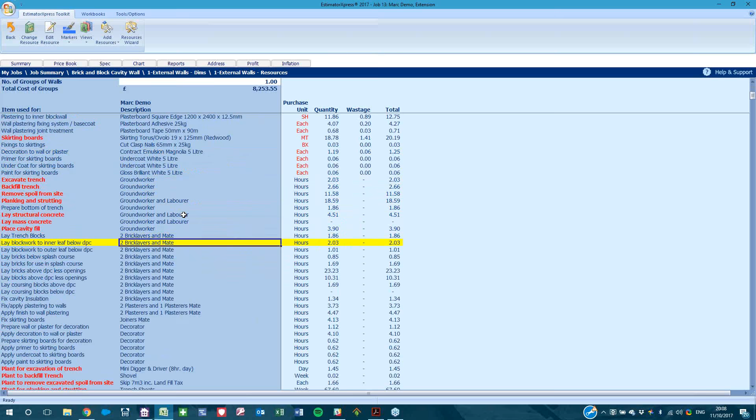Now it's a completely different kettle of fish if you're building a roof—different labour elements, different materials involved. So let me ping out of the brick and block cavity wall and jump into the roof to give you an idea. The roof is costing us £8,000, so there are a lot of elements going into that. We'll go into the main roof, and if I go into View Resources Output, that gives a breakdown of all the timbers and items you're actually using.

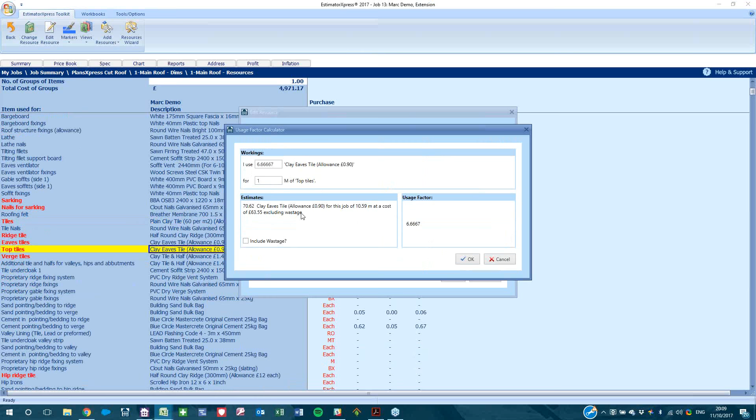But the ones I wanted to look at were the tiles. So if we look at the tiles, we're actually using 1,418 tiles. If I go into Edit Resource, it tells me these tiles cost 70p each—£42 per square metre, because we're using 60 of these tiles per square metre of roof. Maybe on the top tiles there's a slightly different rate, because it's using 6 of these tiles per square metre. So we've got a different rate there. The software has different rates for different materials and different labour all built into it, and that's the point of looking at off-the-shelf solutions—all the work's been put into the software for you.

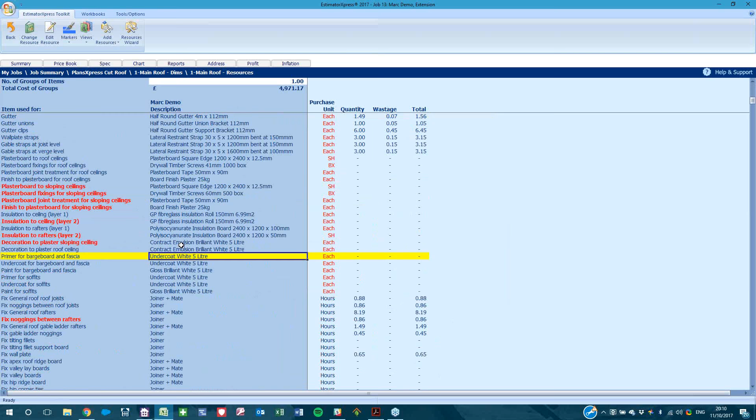But you've got your lead flashing, your guttering and insulation, etc. in there as well. So everything for that roof is all made up. So I hope that might explain the reasons why we've arrived at the price we've arrived at, the £30,000—obviously that's not including any profit at this stage.

Now, if you want to know how much you're going to make—because there's obviously no point tendering for the work if you're not going to make anything on it—if I go to the report section, I'll jump out of the job summary and go to the reports. This will give me a nice breakdown of what we're actually doing. So if I want to see how much we're looking to make, we've got a sales price including profit report. Let's open that up.

For those familiar with Excel, this is a pivot report, and it tells you: 29,915 for the item costs, just over £1,000 for wastage, 30 grand for the total costs, and then just under £10,000 profit we're looking to make. So the total cost to the customer, not including any VAT, you're looking at 40k for this extension at this stage.

We can export these reports if we want to, we can print them off, we can do whatever we want with them. If we want to take the build phase out and stick in the elements instead—how much the baths, the door, the roof cost, how much profit we're making on those elements—you can swap and change a lot of these reports anyway.

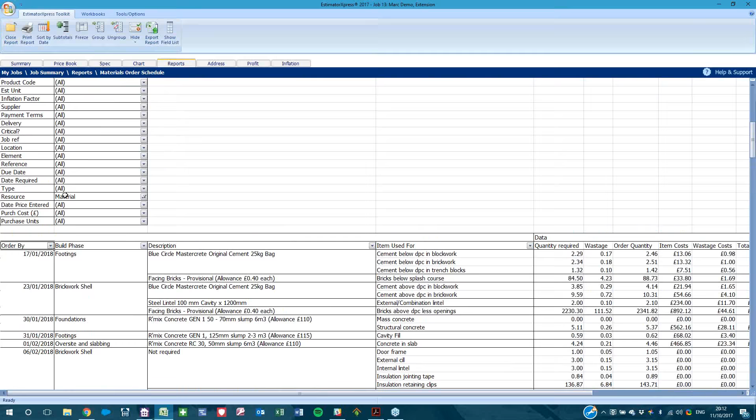If you want to look at your materials scheduling, there's a report in here called materials order schedule that does exactly what it says. That will show you when you need to order your materials, but it's quite a big report, so I'm going to zoom out a little bit—hopefully you'll be able to see that. So that's telling you when you need to order your material by, because the build phase is due to start, what material you need, and how much of that material is required.

Each build phase has its own materials you need to order. Cash flow is important, so you want to make sure you're not ordering materials way too far in advance, while also trying to get the best price, since things do change. So you've got your materials order schedule.

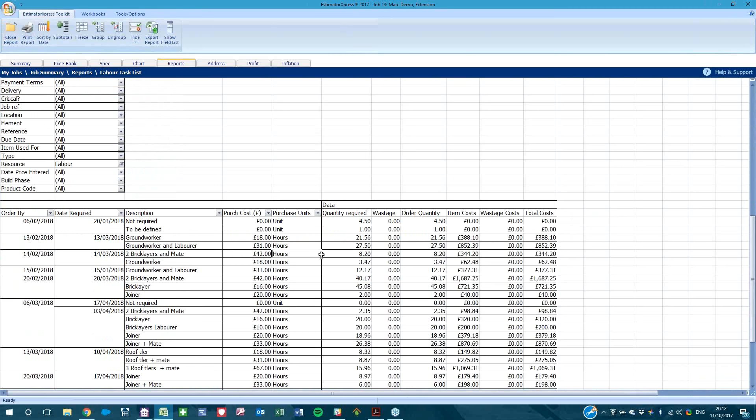You'll also have an idea of labour - I think it's the labour task list. It gives you an idea of your labour elements and when your labour's needed, when you need to get them on site.

There is actually another one, labour - where is it? Used to be able to just ping straight to it, can't find it right now, unless they've taken it out. I'll come back to that anyway.

You've also got - I mentioned it does produce a Gantt chart for you as well. So when you click on the charts, that'll give you a bar chart here, which will kind of give you an idea of the total length of the job.

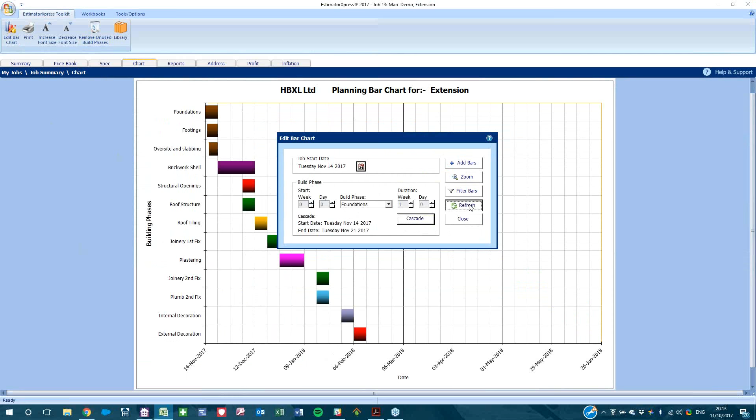Now, we haven't estimated some of these build phases, so we can use that button there that gets rid of the ones we haven't estimated. Then you can change the bar chart, moving certain phases up and down, and that will give you an idea.

Now, if you move any of these phases on the bar chart, that will cascade into your materials order schedule. So if your plastering hasn't dried yet and your joinery second fix needs to be moved up, any materials linked to that build phase will then be rescheduled for you. Again, it's about control, project management, and protecting your cash flow.

As well as on the report side of it, you can then produce the quotation for the customer. So we can go into customer quotations, and we'll pick the one showing a breakdown of build phases.

Now this here is an example of what's going to be on the quote, and it's about being able to demonstrate to the customer. We can give you a detailed quote, or just give you an idea of cost, or show you some key resources that you've specified you want on there.

Or if you want everything on there - materials, labour, plant - if they want to see absolutely everything, you can do that. You can take certain elements out, take the phase totals out, take the pictures out if you don't want to keep them in there - that's down to you. You can include that small inflation cost, so you know it's coming out of the customer's pocket rather than your profit.

Customer friendly descriptions if you want to pop them on there, and again order quantities if you want to put them on. I know a lot of builders, when I show it to them, say they're not going to put quantities on there because customers will be counting the amount of bricks and want a refund. So again, you can either keep that on there or not.

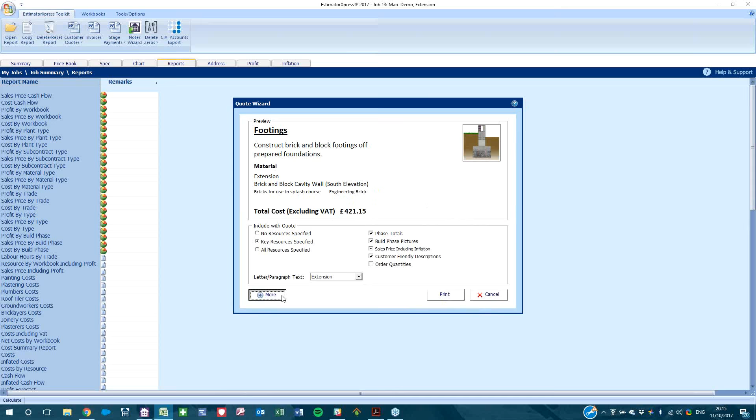You can also make sure within the back end of the quote, under page setup, you've got your own company logo on the quote as well. It's quite important that you put your details at the top of each page with your company logo, so it looks pretty professional and slick.

Same for the opening paragraph - you can change that, change the wording to however you want it to be. Then once you're ready to print off, hit the print button, charge at the VAT rate, and in a couple of seconds it will open in Word, where you can alter it and make any changes you need to.

Save it as a PDF if you send it electronically, so they can't alter any of the items. But in today's day and age, sitting down with a customer, going through it, breaking everything down, explaining what's going to happen, accompanying the chart with that as well, and even the plans - why wouldn't they be putting all their business your way if you can demonstrate you can do all this using this software.

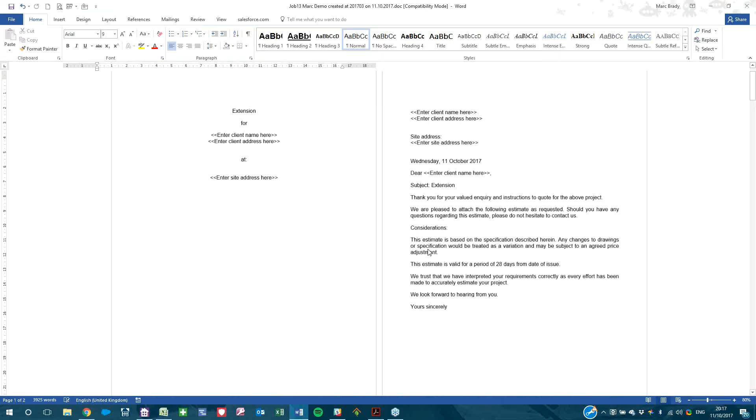So that's the quote there. It's going to zoom out a little bit, and then you can see the breakdown, looking at the build phases.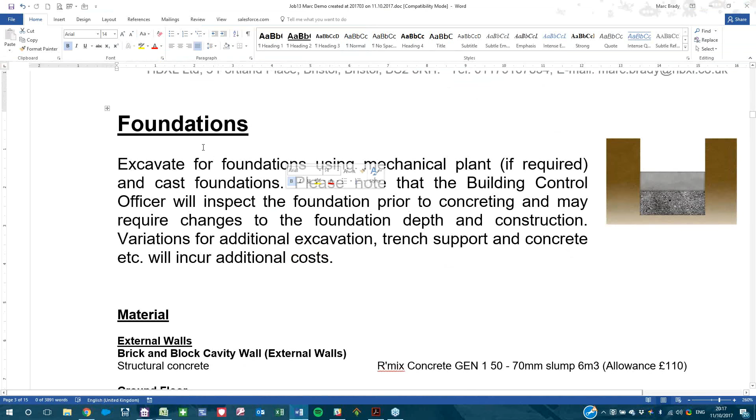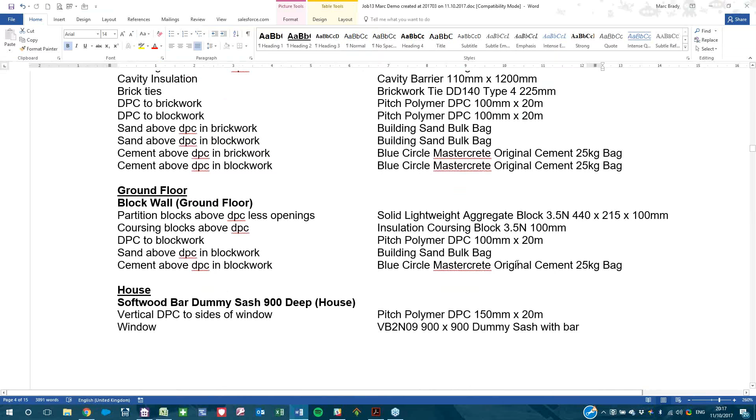That gives you a description of the foundations. It's got your picture on there as well, and then you've got a breakdown of the cost excluding VAT, and then your materials and stuff you're actually listing there. So they can actually see that whatever was discussed at the initial meeting, this is what you've actually used when it comes to bricks and blocks and tiles.

You've got your Crystal Direct information and stuff in there for the doors. We've got labour in there as well. It depends on how much you want to show them, really.

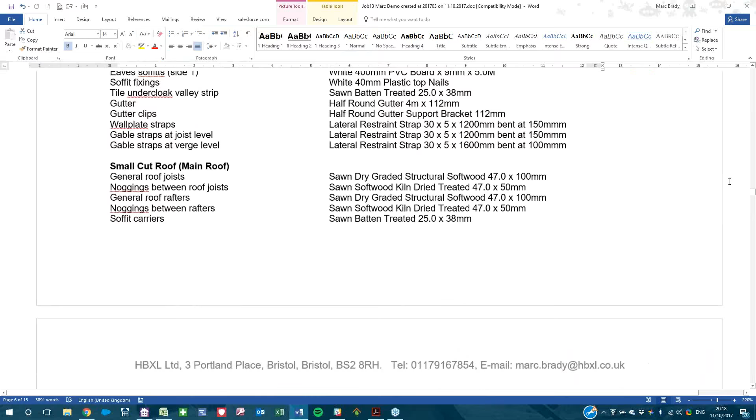I'm just going to zoom to the bottom. It's quite a big old document. You've got an acceptance of the estimate at the bottom, with the price in there - 43 including VAT, and that includes that little bit of inflation we factor in. So including the VAT, the cost does start going up, but at least if they accept it and sign it off, they get a copy as well. So you've already got a pre-agreement that they're happy with it, and then you leave them with your terms and conditions.

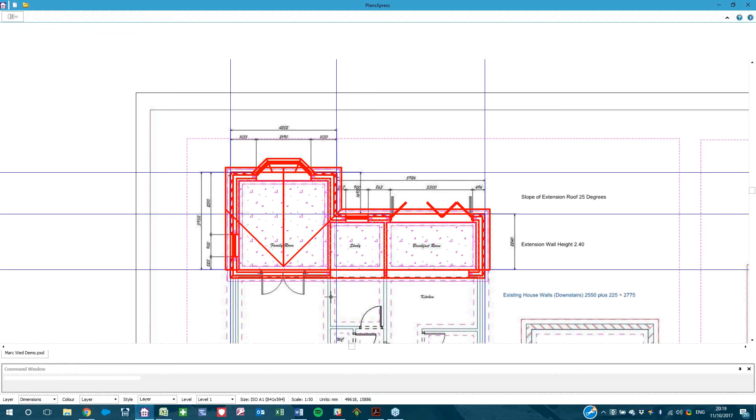For those still in attendance, I'm going to quickly finish off with the quick quote, because I want to show you this before we wrap up this evening. We've seen us using the PlansXpress software with my drawing - we drew around the PDF, put that into EstimatorXpress, and priced it up. But there's also another option you can look at, which is using the quick quote.

You saw in this menu we used PlansXpress import, but this time I'm actually going to use quick quote. Quick quote is a really quick way of putting a price together from a predetermined template, because a lot of the work you do, extensions and stuff, follow the same kind of footprint. They don't really vary too much, though sometimes some jobs are a bit more complicated than others, more detailed depending on what the customer wants.

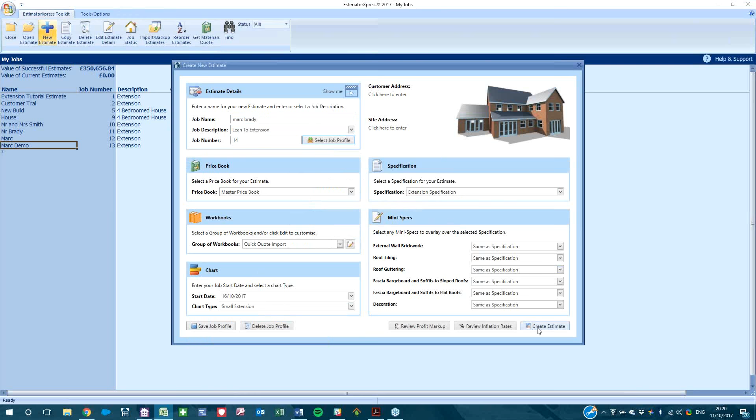What we can do is choose - let's get past this screen quickly. I'm just going to pop my name on here. Job description is going to be a lean-to extension. I can also select a job profile, and that will fill in a lot of these details for me really quickly - it picks out a chart and also picks the extension spec. So I'm going to press create estimate.

Now it's going to present me with a library of different templates for me to use. I'm just going to make that a little bit bigger and filter that by extensions, and we can also pick whether it's going to be a render, a stone finish, or just brick. So I'm just going to pick a brick.

Now you can see here we've got different types - an apex roof double story extension, a hip valley double roof extension, a lean-to double story - so you can see from this page you can pick different templates that you're probably coming across quite often. So I'm going to pick an apex valley roof double story extension as my template.

What it's then going to say is, well, are these the items that you want to estimate? Let's say we're not doing any sleeper, there's no roof windows on this, but we'll keep the rest of it as a guide anyway. So we'll click OK, and that's your overall shape.

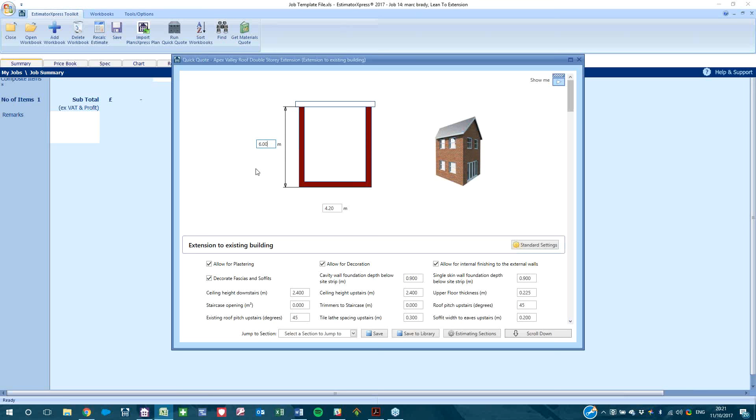So we know that the actual length is, say, we'll change that to 6, and we'll change that to 5 - so that's done. Now it's also giving you some standard sizes here: ceiling height 2.4, that's fine; upper floor thickness 225, great; pitch is 45 - well, let's just change that to 40.

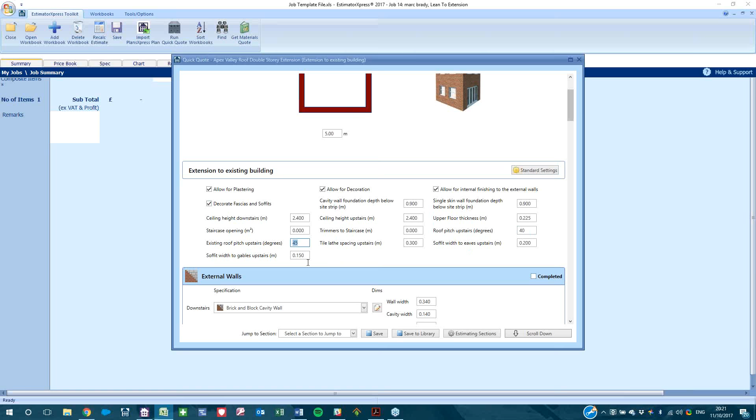And then it's up to you if you want to change the rest. We've already got the external walls, so the downstairs external wall is brick and block cavity wall, champion. Upstairs, well, let's change this up a little bit - upstairs is actually going to be an external cavity block wall, so we're going to render the upstairs wall slightly different. The wall width 340, cavity width 140.

Floor, we've got an extension slab, ground bearing. Upstairs we've got an uninsulated timber floor, we could change that to an insulated one instead. The floor finish, we're doing a floor screed with the mesh insulation. Roof, we're doing a cut roof, plaster and insulating a flat ceiling, or we could change it if we wanted to. Yeah, that's all right, that's all done.

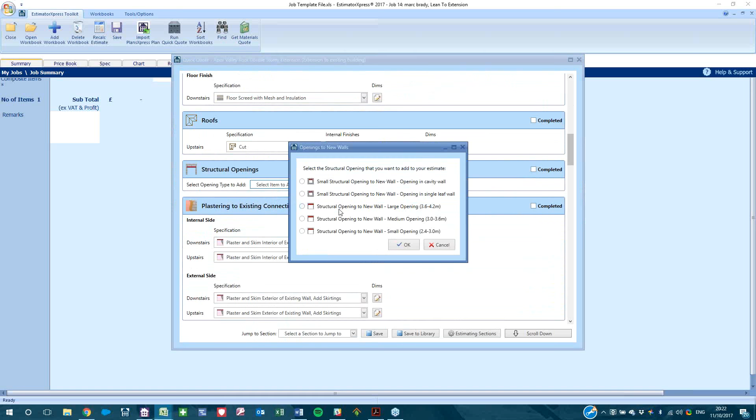Structural opening, yeah, we've got one kind of structural opening there. It's a structural opening, and then that will open it up. Yeah, let's change that back to 3.3, accept defaults.

Downstairs we've got a large opening. We haven't got any upstairs, and then you can also say that the wall opening form within if you need to. Plastering to an existing wall, again, not required, maybe not required. Might want to leave those two in.

External doors, let's say we're doing these, and then that will open up your kind of crystal. Let's say we'll just kind of pick that one for argument's sake. Got one downstairs.

Windows, you can pick some. Then we can kind of pick as many windows as you want. And again, you could pick one downstairs, one upstairs, depending on the other windows.

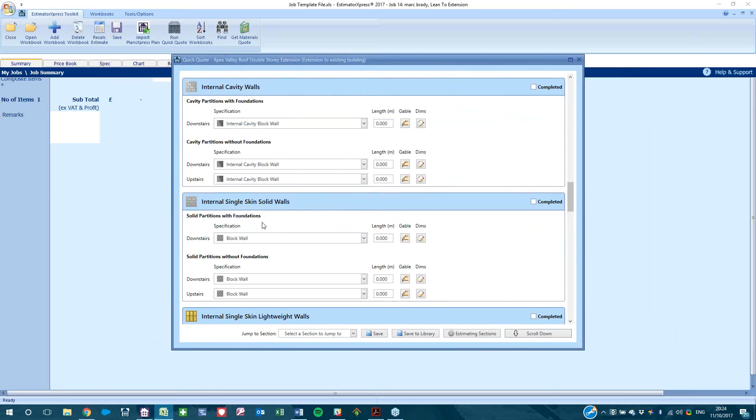And then internal cavity walls. And then you just kind of work down the list, adding what you actually want to kind of add. Plastering, decorating, wall and sundry, stairs if you want them. So you really just do kind of pick from the actual list. And then once you kind of get to the bottom, you can say create the actual quote.

It will just ask me to confirm, making sure that the actual openings is right. So I was meant to press no rather than yes. It asked me to go back and have a look at it. So similar to what we were doing earlier with PlanXpress, it then just starts building the actual estimate based on that kind of list of information.

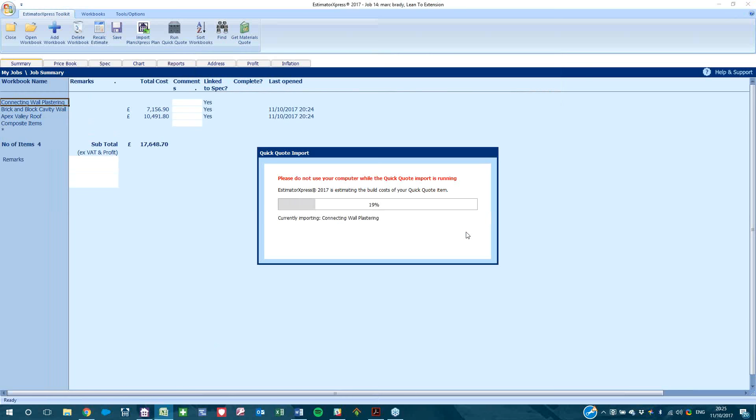So we've kind of timed, Adrian, the MD, had a look at just doing a standard extension, a typical extension, from top to bottom. Probably got through it in around about 5 to 6 minutes with a price off the back end. And as you can see there, it just starts estimating those items based on the overall size of the extension.

So that's the kind of quick quote plugin, and then once it's been estimated, then you can go in to each element. If you want to tweak some of the elements, swap out some of the materials and stick them back in. But at least you've got a footprint, a kind of initial templated price already in there, ready for you to tweak a little bit more in detail.

So I know, speaking to a lot of builders and doing a lot of estimates, it can sometimes take days, if not weeks, to kind of put prices together, if you have to run around, or when it comes to guesstimating as well, that can certainly have repercussions.

So you've actually got a price there of that job, 37,611.79. So we've done the brick and block cavity walls. We've done the upstairs and downstairs, slightly changed the upstairs and downstairs. Got a slab in there, suspended floor, structural opening, roof. Got our doors, windows, connecting wall plastering. Got some screed in there as well as some composite items as well to look at. Well, at least it gives you a kind of a quick price.

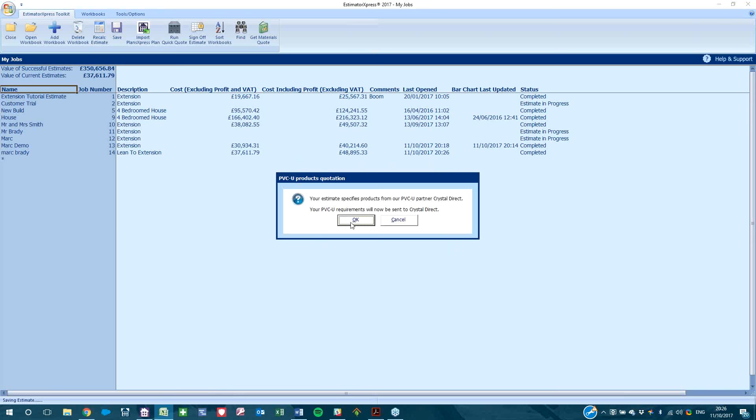But once that price is done, and you do have a similar lean-to in that area, then all you do is, rather than creating a new estimate from scratch, you copy your previous estimate, call this a Mark II. Again, it's an extension. We can then just copy the price book over from the original, put the customer's details in, then press finish, and then we've got a carbon copy of the previous estimate anyway. So then just go in and tweak the various elements, and you've got two jobs that are exactly the same.